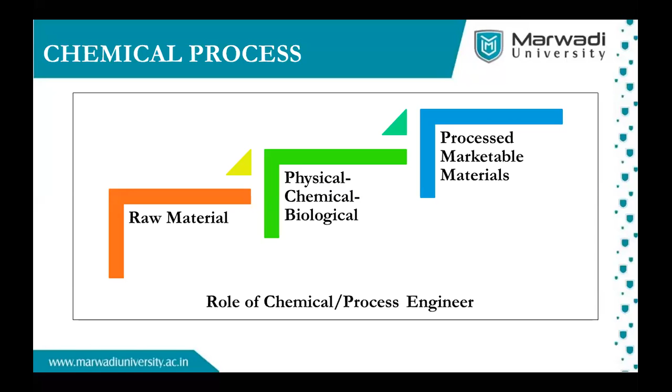So ultimately, we are talking about chemical process modification. The pressure, temperature, and process calculation, stoichiometric ratio, and all those things, we are optimizing at the pilot scale, that is commercial scale. And then we do the scale-up. Scale-up means the reaction we take up to tons or more than that.

So normally we do three steps in any industry, keeping in mind economics, safety, and sustainability. Sustainability means again we are focused on cost competitiveness.

When we do the modification or intensification of any process, we have to focus majorly on the middle stage, where we do the modification in that process or units, and we call it intensification.

So the major objectives of intensification: in process modification, we want to make the unit as small as possible, because when the size tends to reduce, automatically the energy problem, the environment problem, and the handling problem will be reduced, and efficiency will automatically be connected to that smaller process.

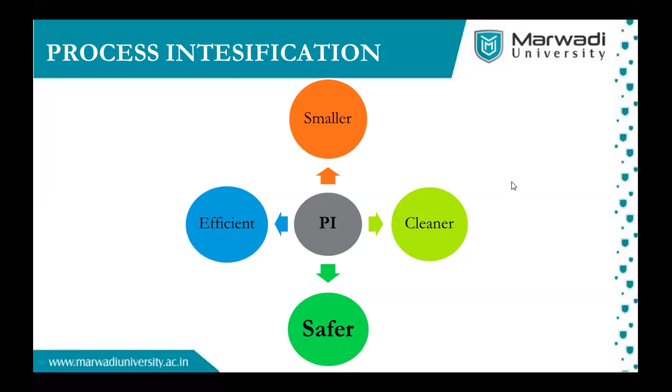Sir? Yeah, definitely, Ritesh sir, definitely.

Process intensification, as suggested by Dr. Manish, is a kind of approach where you can improvise your process by considering those four parameters, and at the end, safety is of utmost importance.

It may come across along the processes we've been discussing since the start of the industrial revolution. When you go through different literature, you will find various examples of how process intensification came into picture.

One of the best examples, already referred to, is from 16th century technology for gold production from ores. If you look at this picture on your screen, there are different kinds of reactors, stir tanks, and stirrers, and you can see how these are working. This is the technology used in the 16th century.

As you might have studied, there are different kinds of propellers, their shapes, sizes, reactors, what a CSTR is, and how they are connected in series or parallel. You can see different kinds of things from this picture. These are taken from literature demonstrating the woodcut technology used in gold mines for production of gold from ores. This is just an example of where we started. Please remember this is technology from the 16th century.

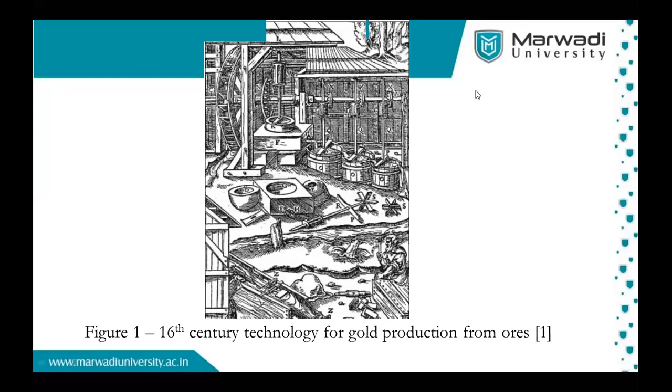So what have we gained due to process intensification? These are very important points to discuss. One should see how to improve energy requirements and process efficiency. As discussed earlier by Dr. Manish, what we want in a process is minimum resources, minimum raw material, to convert that raw material into the desired marketable product. As you are aware, this can be done with the help of different kinds of machinery and different kinds of reactors.

So everyone knows that energy is one of the important parameters that has to be taken care of. Ramshaw has given different definitions for this. In one of the definitions, he discussed that there will be a dramatic change in the system or dramatic change in the process. How is it to be done? It is to be carried out with the help of its energy content and efficiency.

So ultimately, if the amount of energy required for any processing is to be reduced up to a certain extent, then anyhow that efficiency of the process, either it may be chemical process or mechanical process, it is going to be increased, and that is what our aim is. So it is one of the important parameters which we have to discuss, and this is what we want as a part of this webinar - what you guys want to share, your knowledge after this webinar, is what we have gained through this process intensification.

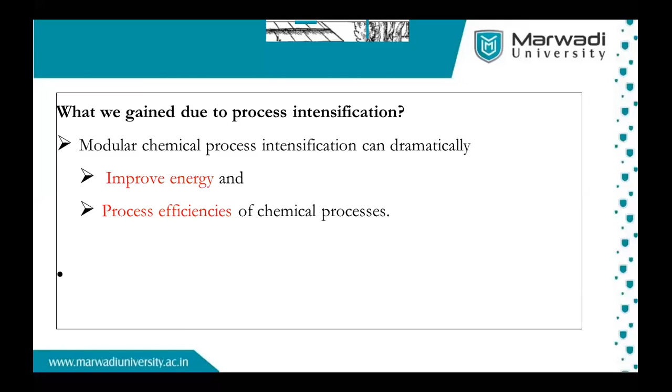Dr. Manish, do you want to discuss something? No, no, continue sir. Continue. Okay, fine.

So in the last slide, we were discussing that we are looking for minimization of energy, or let's say process efficiency should be increased in such a way that we have to maintain the safety features, as well as we should not hamper the features of environment. So let's say this is a cycle - if you want minimum energy and maximum process efficiency, it must go through the different environmental parameters which we have to take care of, and safety is also very important. So this is the four quadrants of any process, and that has to be taken care of when you start your process, right?

So as Dr. Manish has already explained how to do process intensification, you can enhance the heat and mass transfer properties of any process depending upon the nature of the system, right? Sometimes it is also said that when you have less residence time, it varies again depending upon your requirement. So you can have enhancement of its properties in terms of heat, mass, momentum transfer, right?

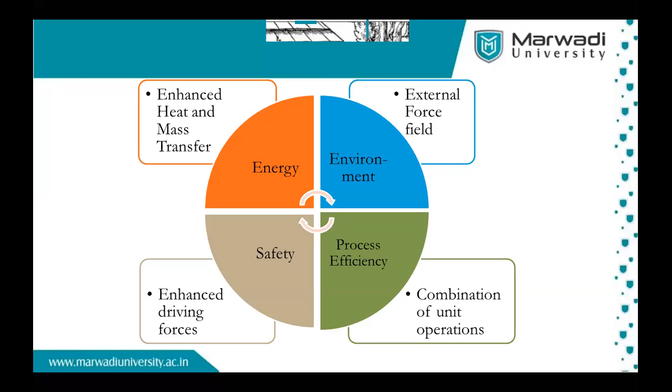When we are talking about environment or external force field, you can see that when force other than gravity is used, like centrifugal force, as I told you in the settling tank example, rather than gravity force, if we apply centrifugal force, there is an advantage of fast settling. The same way, if we apply centrifugal force in the dust separator, you can see the settling of the heavy material, the rate of settling will be faster than gravity separation.

So we can use this type of external forces to modify the process or to get the intensification. There is no limit about the force which you can apply. So in that way, as you apply the centrifugal force or any other forces, the ultimate aim is to increase the heat and mass transfer rate.

Once you are able to increase the heat and mass transfer rate, you are achieving efficiency, you are achieving the safety aspect parallelly, and you will get the advantage of reducing the size. The major point is once the rate of heat or mass transfer is increased, for the same capacity which you are utilizing in that unit, you can reduce the size, and automatically your safety aspect will be improved, as well as there will be a reduction in the residence time. This is very, very important.

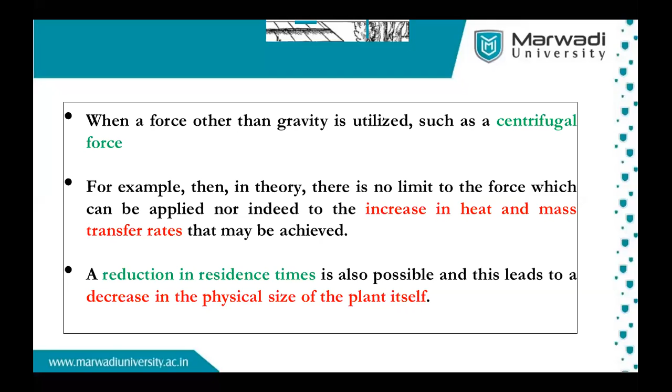Ritesh sir... Ritesh sir. Sorry, there was some problem.

As suggested by Dr. Manish, we have to deal with different kinds of forces, as he suggested in terms of the example of the settling tank. The force which is required in general is, let's say, gravity. But other than gravity, which kind of forces you can apply on the system, and how to achieve the required process parameters in terms of improved efficiency, that is discussed by Dr. Manish.

Next, in general, you might have a question in your mind, what exactly is process intensification? It is nothing but a dramatic and drastic change in the process industry or in a process. How it is to be done, or how that change has occurred in the system, depends on your methodology which you are going to acquire.

So the first one may be based on the equipments, and the second one is based on which kind of methods you are using for your process. So let's say equipments, which kind of equipments you may have.

If someone asks you which kind of equipments you want as a chemical engineer, definitely one of you will answer: there will be some equipments where I can carry out chemical reactions, and there are some processes where I don't want to carry out reactions, but at least there must be some change, as discussed by Dr. Manish. Because chemical systems are divided into mechanical processes and physical processes. Sometimes you just want to crush it, right? So sometimes there will be a chemical reaction, sometimes there won't be. So equipments may be divided as with and without chemical reactions.

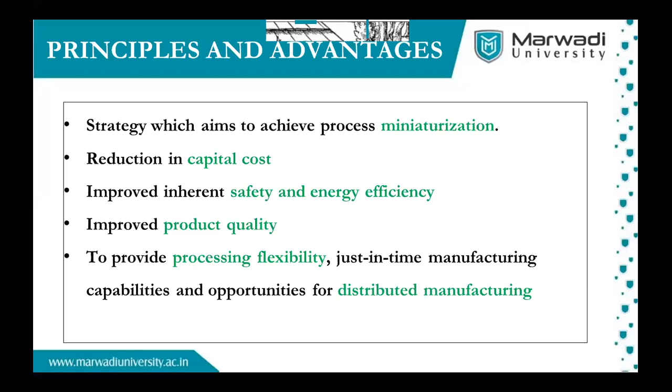And just-in-time manufacturing time is automatically manageable or reduced. And there are capabilities and opportunities for distributed manufacturing—meaning you will have more capability and more opportunity to increase derivatives of the product for distributed manufacturing. So these are the major advantages of this intensification process.

Yeah, definitely, Ritesh? Manish sir, yeah, definitely—as you discussed in the last slide, there should be flexibility, right?

One important point which has been highlighted by Dr. Manish is flexibility of your process along with different kinds of process parameters, right? So let's say there are different kinds of parameters, process parameters, along with its components. Let's go with a very basic unit operation system.

We know we want different kinds of reactors; those can be used for different processing units. Just for discussion, let's say we have different kinds of equipment like heat exchangers, distillation columns, separators, which Dr. Manish already discussed. So if we try to intensify those individual items in the process, the system is automatically intensified.

So how do we intensify all these things? As I discussed earlier, PI is divided into two sections: one is based on methods, and second is based on, let's say, parameters or equipment.

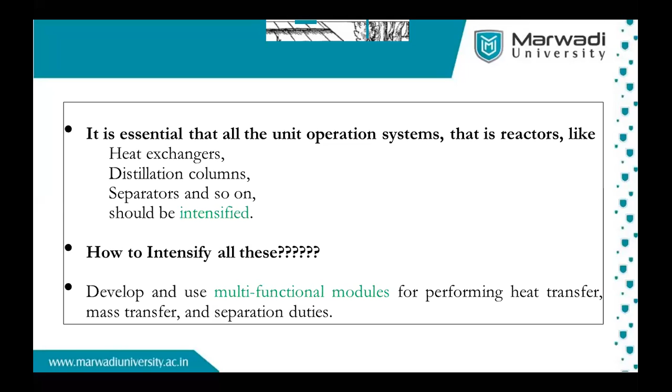Yeah, but what exactly is it? You might be in a dilemma that Dr. Manish and Dr. Ritesh are discussing process intensification. But what exactly is it? What is its boundary? What are its limitations? What are its applications? Okay, so let us discuss what it encompasses.

So today we want to discuss this in the form of "not only" and "but also." Process intensification is not only the development of novel reactors, novel systems, or more compact equipment, which Dr. Manish has already discussed, that compactness or flexibility. But it also tries to provide intensified methods which can use a variety of techniques that have not been used as a single unit. One of them is the ultrasound technique. The second one is radiation.

Take the example which Dr. Manish has already emphasized, for the reactors. In some reactions you may require heat, or somewhere you may not require heat. Sometimes heat may be generated inside the system when the reaction is going on. Sometimes you want to give heat to the process from the outside. So these are the things which we need to encompass inside the system. So this is what process intensification is all about. Next slide, sir.

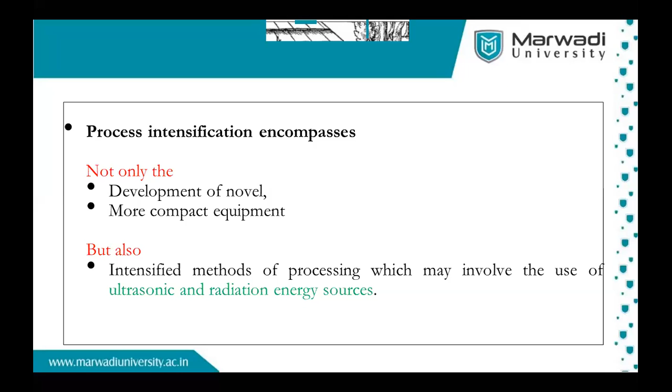So this is what we have to discuss: we want intrinsic safety and how it will increase energy efficiency. Though we are discussing the scale-up of plants along with different kinds of reactors, unit operations and unit processes, it must be intensified along with benefits like safety and energy efficiency, which every inspecting body is emphasizing nowadays, right?

So it is very important that we add those inventories in such a way that will reduce the hazards. Whether it is a unit operation or unit process, we have to deal with the parameters where we can reduce the hazards, any kind of hazards which we can discuss in terms of SHE, right? Yeah, next one, sir.

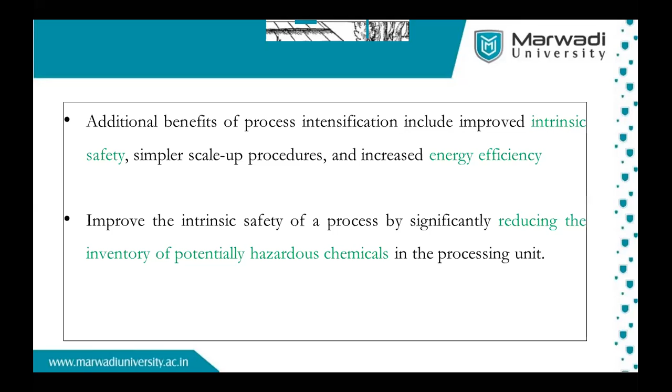Yeah, these are the advantages. Dr. Manish started with a very simple example which we as beginners can focus on. So what is the advantage? There are different processes which have to be carried out in batch mode or in continuous mode. So can we alter the situation? Can we increase our production? Can we reduce our inflow? Can we decrease some kind of intrinsic parameters, right?

So this is one of the parameters the process engineer may look after, that there may be interconversion between the process parameters. First, we can switch from batch to continuous process. What it can facilitate is a more efficient system, and it minimizes the hazard. So this is what we want to emphasize in process intensification: we have to increase efficiency, but at the same time reduce the hazard, of any kind. Next one, sir.

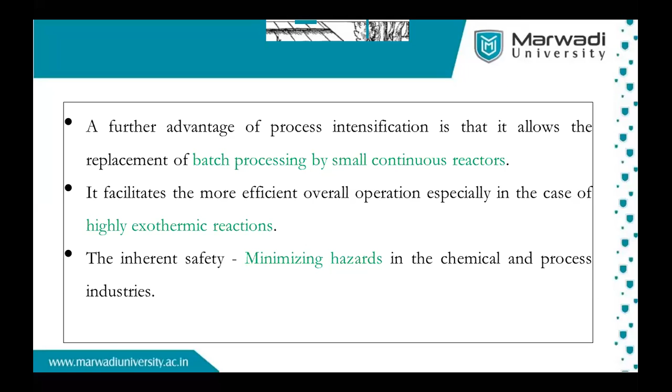Okay. So this is the best example of the intensification process, the conversion of batch into continuous. Yeah, that is a great example, sir. Yes, and that is what Manish sir was discussing, about how they have converted the batch process into continuous, right?

So to be a technical graduate, we have to deal with different kinds of design parameters or design considerations. Okay, so let us start with the very important discussion: what are the design considerations? Because as an engineering graduate, we have to look for different aspects. This will be a bucket list for any engineer: if you want to do PI for your process, what should I do? Initially, I will go to the literature, I will go to the various examples set by other industries, and I will try to put my perception about that.

So, as we discussed earlier, whether the process is based on batch or continuous. Next, and very important as a chemical engineer, does this process have any rate limiting step? It may be in terms of heat transfer, mass transfer, mixing, and so on, depending upon your process. Then if you are aware that I have n number of parameters, n number of equipments which I have to intensify, which appropriate intensification tools can I use? So I can create my own modules. What concepts do I need to implement?

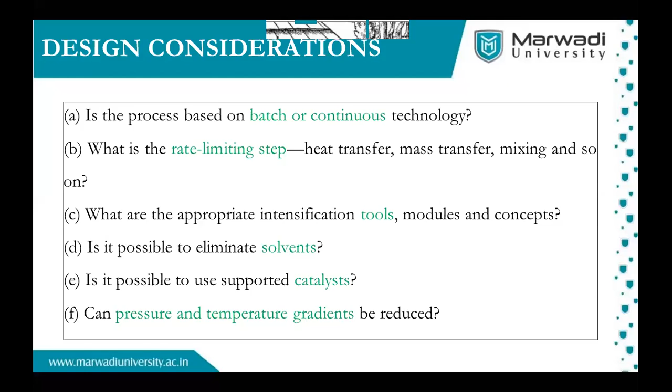Apart from that, how many stages can we have? Sometimes, though you will work on different criteria to have multifunctional modules, there may be some loopholes, right? So how to identify those, how to rectify those, how to troubleshoot those?

And let's say how to enhance my transport rate. As a chemical engineer, we have to discuss heat, mass, and momentum transfer. So how to deal with all these parameters, and what is their correlation with other parameters. So if someone is saying that PI is necessary, in my personal view, yes, PI is very, very necessary, but it can be implemented only and only after a detailed study, detailed plan, and detailed blueprint. Otherwise, your system may fail.

Okay, so these are all the design parameters which one can decide. Once again, I want to highlight, as we are discussing very basic things, these 6 to 7 design parameters may change, may vary as far as the different processes are concerned. Okay. Yeah. Next slide, sir.

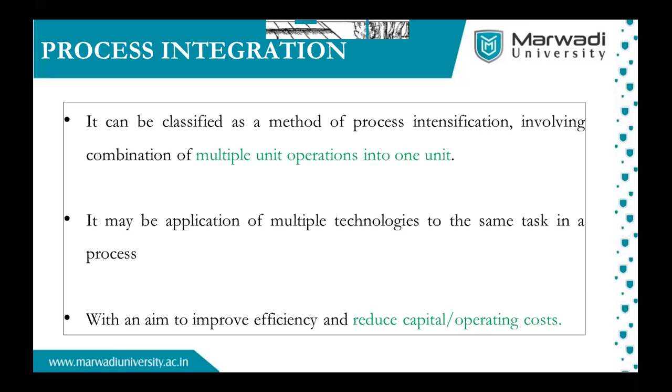So how to achieve process integration? You can achieve process integration when separate people or things are brought together. When you bring all the small units into one unit, try to compact. If you have 10 units, try to reduce them to 8 or to 5. So you can say it will be integration. And you can reduce the whole process size with the help of integration, and it will give a lot of benefits.

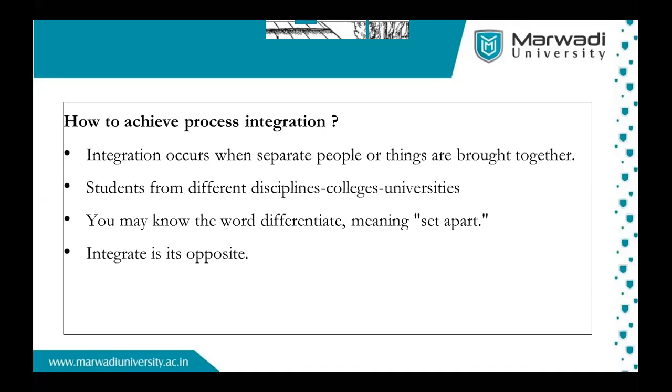So when you use this integration process, you have to apply a lot of controls to do the integration, and you have to execute the cross-system process sequence. What can be done in sequence so that the process can be reduced? You have to monitor that process in such a way that you can reduce the size.

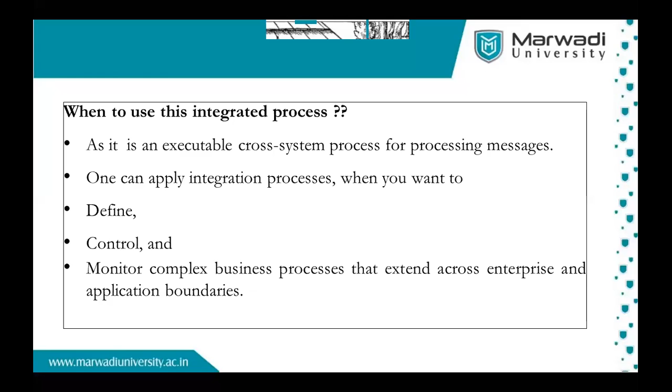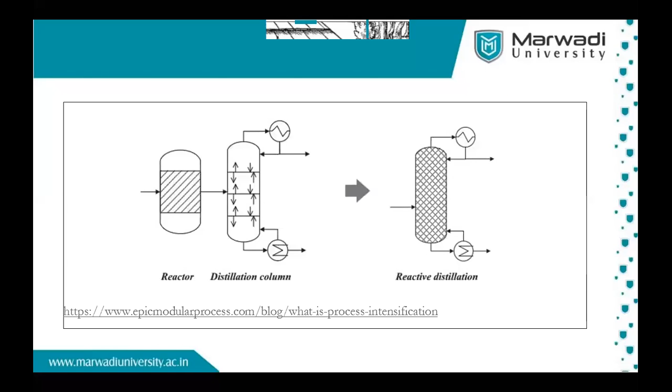Ritesh sir, the best example of this is nowadays the distillation column. There is research going on on how to convert it into reactive distillation, the combination of reaction and distillation all together in one place. Ritesh sir? Definitely, this is one of the best examples, which we have already cited, where reaction and distillation are combined into one section, giving reactive distillation.

Actually, distillation itself is a big, let's say, industrial reactor where we can have different kinds of reaction mechanisms. And if we can combine that as a hybrid, as a process-intensified method, yes, we will benefit. And as sir suggested, a lot of research is going on, and many industries have already installed different reactive distillations.

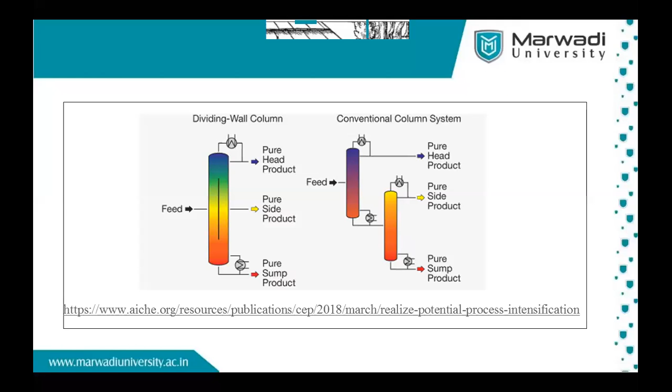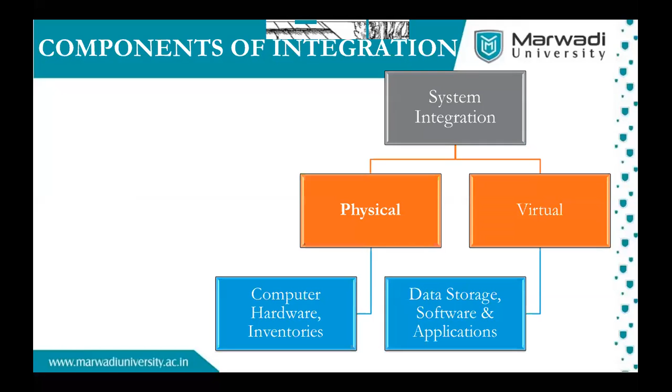As far as system integration is concerned, we have to look at the physical and virtual aspects. These are the two aspects for the integration. In physical, most of the hardware, computer hardware and inventories will be there. And in virtual, you have to talk about data storage software and utilization of software. You have to use the software to integrate the process.

For integration of process, we are going to show some examples, because a full discussion would take a lot of time and we are short on time. This is one example from Corning Industries, where they worked on a monolithic reactor. These reactors provide low pressure drops and can support different kinds of reaction systems and mechanisms. But if you combine that monolithic reactor with different kinds of reactors, along with heat, momentum and mass aspects, a lot can be achieved.

Let's look at the pictorial view on the right side, that tree which doesn't have any components. But when you start, on the left side you will see the green tree. When you go for any PI, you are going to increase the efficiency of the system. So as far as the picture is concerned, we can have different kinds of interpretation. That's my own interpretation which I thought to share with you. You can go through Corning's website for different PI methods.

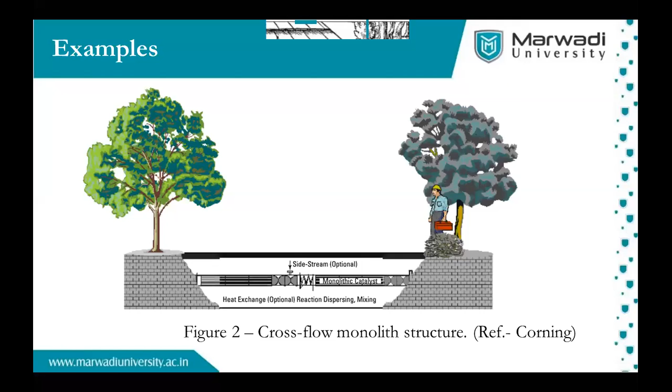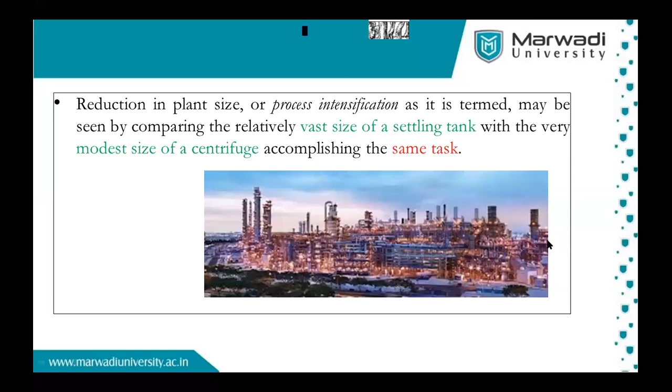Yes, so this is one example. Yeah, please proceed. Continue, sir, continue.

As I discussed in the last slide, we have to reduce the size of the reactor and check its connections. One example we thought to discuss with you was oil drilling rigs. When we have the next webinar, we'll try to discuss this in detail.

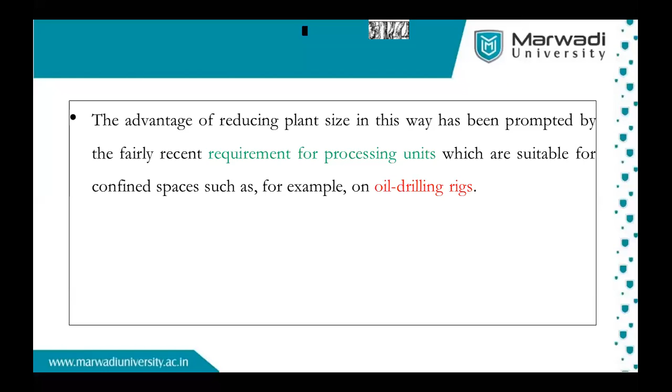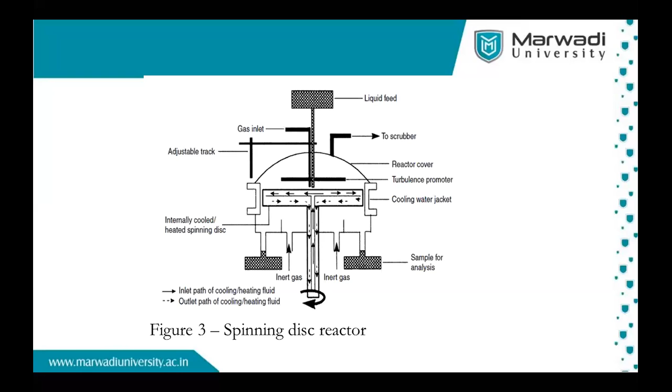Spinning disk reactor is also one of the important techniques, given by Eastman. Spinning disk we will try to discuss in the next webinar whenever we have time. This one is from Eastman Chemical.